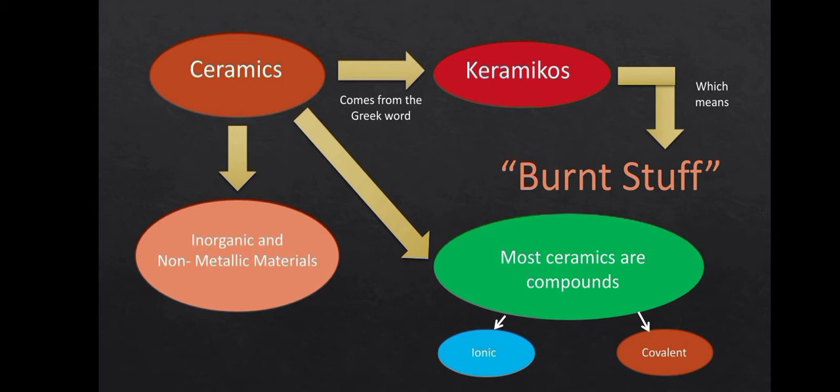Ceramics. The tradition of creating ceramics is something that started thousands of years ago with the invention of pottery, glass, and brick, and it's something which is continued today. New ceramic materials are being created in order to meet new challenges.

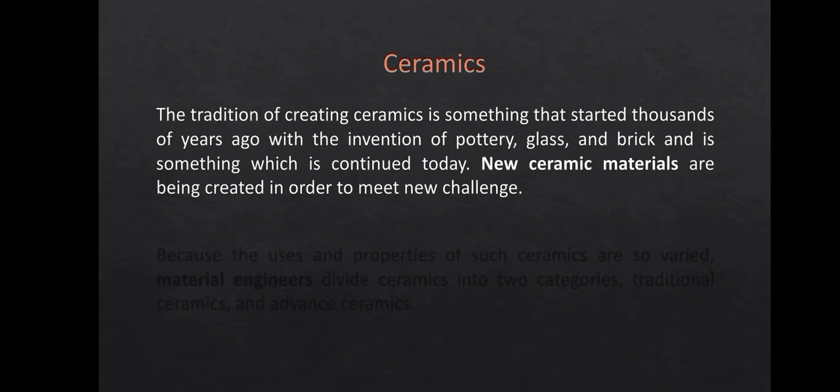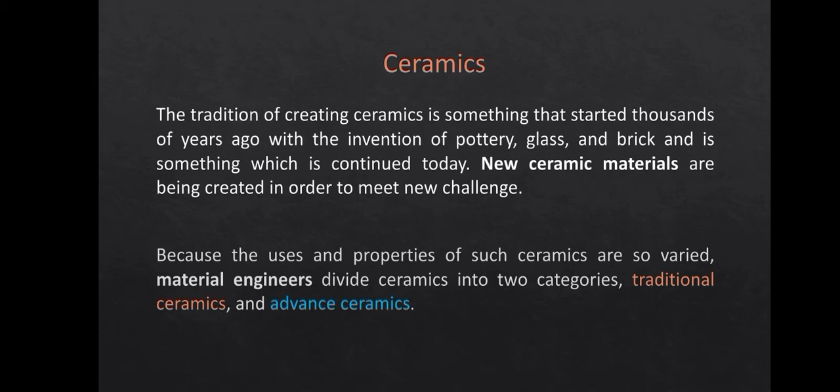As mentioned previously, the properties of ceramics vary depending on design and application. However, many ceramics are known to have the following properties. Una, they are hard. Yung mga ceramics ay hindi madaling magbago yung size and shape. Kalawa, they are brittle, meaning they have a low resistance to impact.

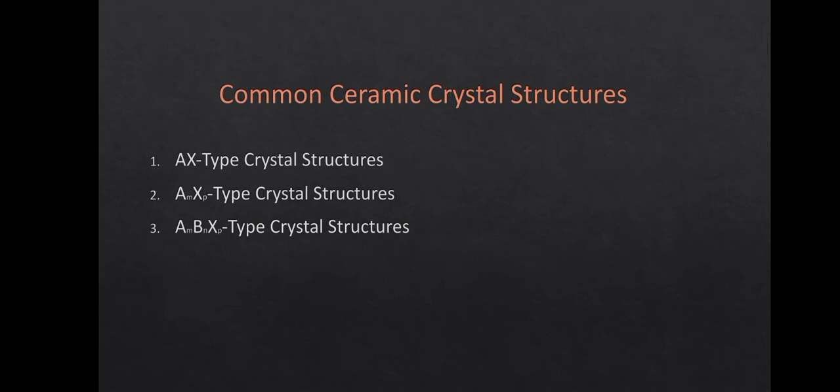Common ceramic crystal structures. So, una, AX type crystal structures. Kalawa, AmXp type crystal structures. At ikatlo, AmBnXp type crystal structures. So, sa AX type crystal structure ng ceramic, yung number of cations ay equal doon sa number ng anions. So, yung A, tumutukoy siya sa cation, habang yung X naman ay tumutukoy sa anion. So, ilan sa mga halimbawa ng AX crystal structure ay ang rock salt structure, cesium chloride structure, at zinc blende structure.

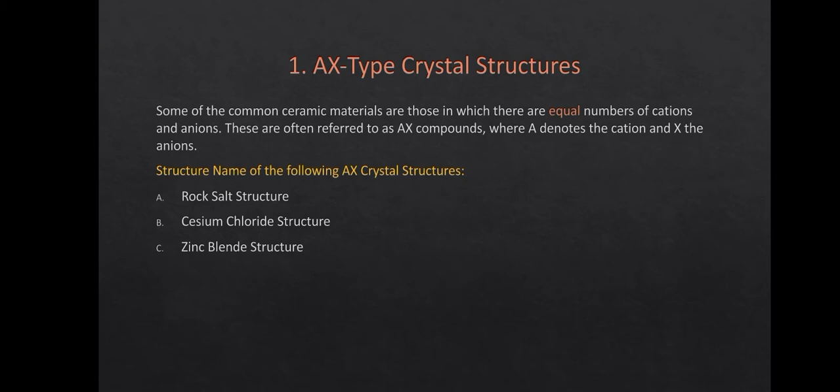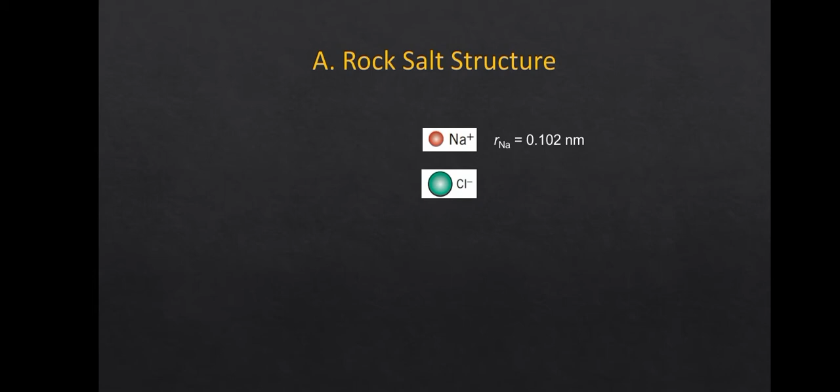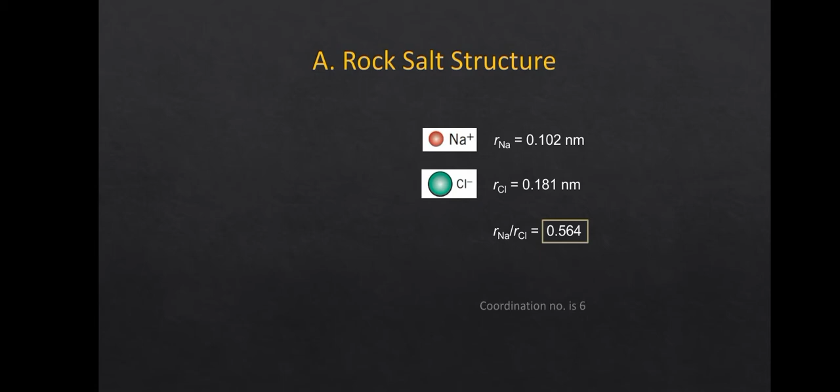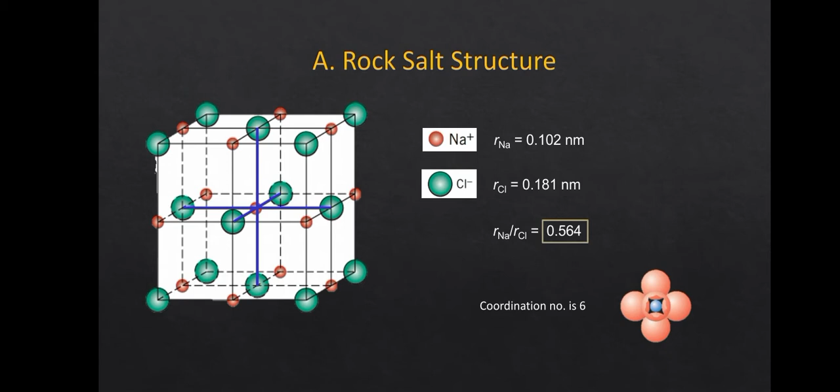So, yung rock salt structure ay binubuo ng sodium at chlorine. So, kung mapapansin nyo, equal yung number ng cations doon sa number ng anion. So, yung radii ng sodium ay equal to 0.102 nanometer, habang yung radii naman ng chlorine ay equal to 0.181 nanometer. So, yung ratio nila ay equal to 0.564. Then, yung coordination number nila is 6. Kaya, yung coordination geometry nila ay octahedral. So, ayan yung itsura ng rock salt structure. Yung rock salt structure ay maliit na bahagi lang ng rock salt.

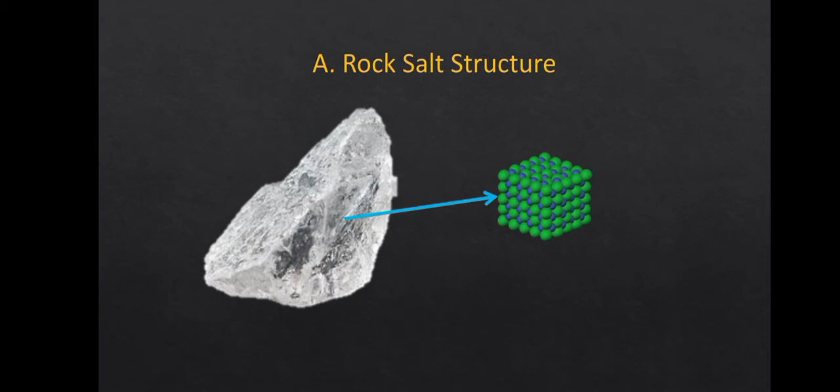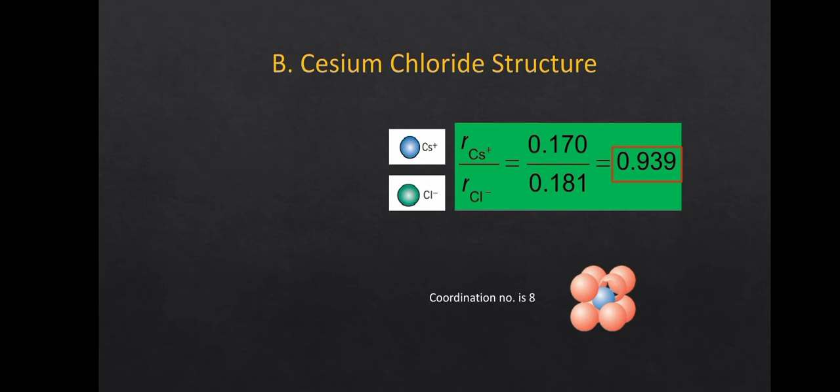Next, cesium chloride structure. So, meron tayo ditong cesium at chlorine. So, yung ratio nila ay equal to 0.939. Kaya, yung coordination number nila is 8. At yung coordination geometry nila ay cubic. So, ayan yung itsura ng cesium chloride structure. Next. So, yung cesium chloride structure ay maliit na bahagi lang ng cesium chloride.

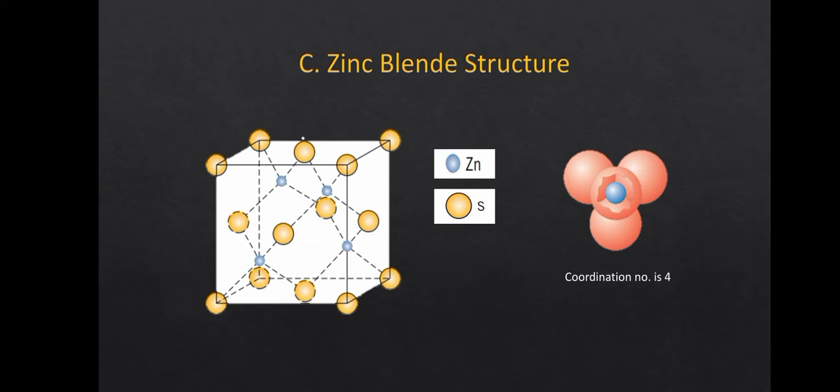Ayan. So, zinc blende structure. Yung zinc blende structure ay binubuo ng zinc at sulfur. Yung coordination number nila is 4. Kaya, yung coordination geometry nila ay tetrahedral. So, ayan yung itsura ng zinc blende structure. Yung zinc blende structure ay maliit na bahagi lang ng zinc blende. Next,

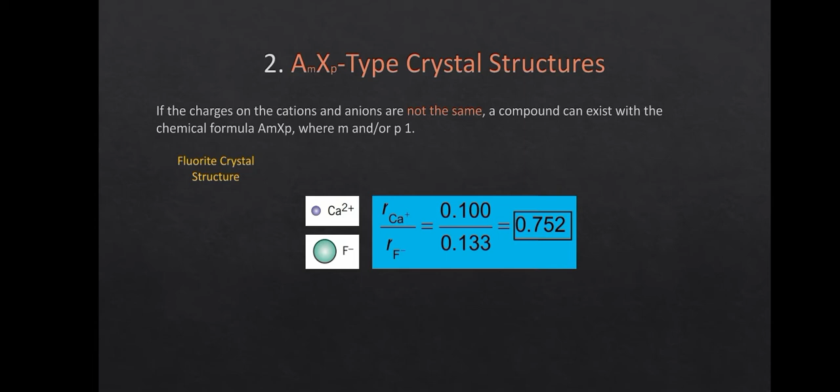AmXp type crystal structure. So, dito naman, hindi na equal yung number ng cations dun sa number ng anions. So, example nito yung calcium at fluorine. Yung calcium, meron siyang dalawang positive charge, habang yung fluorine naman meron siyang isang negative charge. Yung ratio nila ay equal to 0.752. Kaya yung coordination number nila is 8. At yung coordination geometry nila ay cubic. So, ito yung itsura ng fluorite crystal structure kapag pinagsama yung calcium at fluorine.

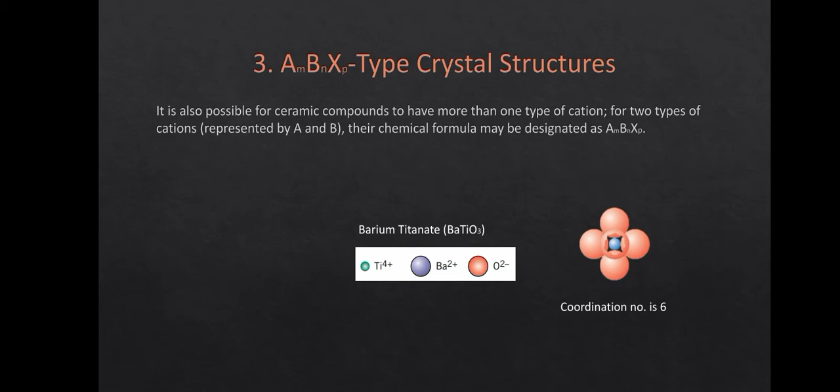Next, so dito na tayo sa last. AmBnXp type crystal structures ng ceramic. So, dito meron tayong dalawang magkaibang element na may positive charge, then meron tayong isang element na negative charge. So, isang example niyan, kapag pinagsama-sama yung tatlong yan, ay yung barium titanate. So, yung coordination number nila kapag pinagsama-sama mo sila is 6. At yung coordination geometry nila ay octahedral. So, ayan yung itsura ng structure nila. Tinatawag na perovskite crystal structure.

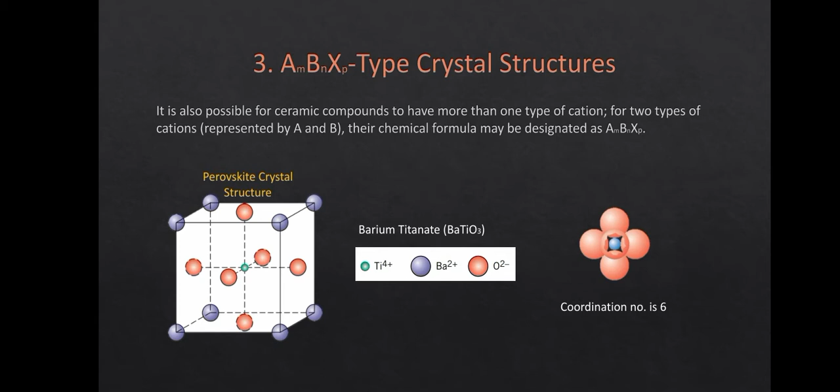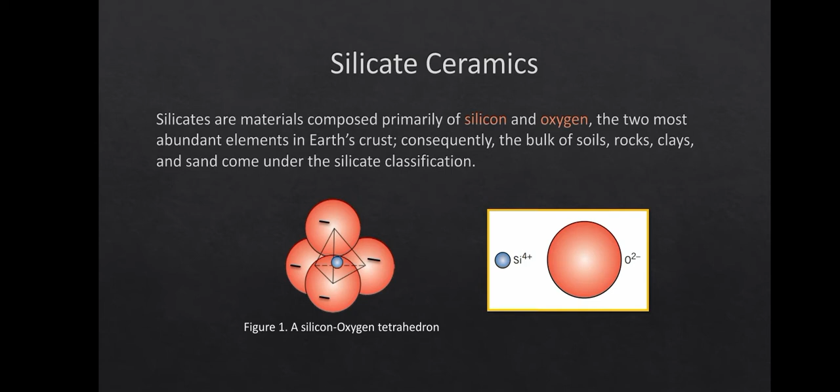Silicate ceramics. Silicates are materials composed primarily of silicon and oxygen, the two most abundant elements in Earth's crust. Ilan sa mga halimbawa ng silicates ay yung soils, rocks, clays, and sand. So, naturally occurs yan. Ibig sabihin gawa ng kalikasan. So, ito yung figure 1 na nagpapakita ng coordination geometry ng silicate. Silicate ceramics include the following. Una, the crystalline silica. Ikalawa, layered silicates. At ikatlo, yung non-crystalline silica glasses.

Crystalline silica structure. Chemically, the most simple silicate material is silicon dioxide or silica. It is a three-dimensional network that is generated when the corner oxygen atoms in each tetrahedron are shared by adjacent tetrahedra. Thus, the material is electrically neutral and all atoms have stable electronic structures. So, kung matatandaan nyo kanina, yung characteristics affecting the crystal structures. So, dito, kinakailangan electrically neutral and stable yung structure. Para maging stable siya, kailangan yung net charge niya ay equal to 0.

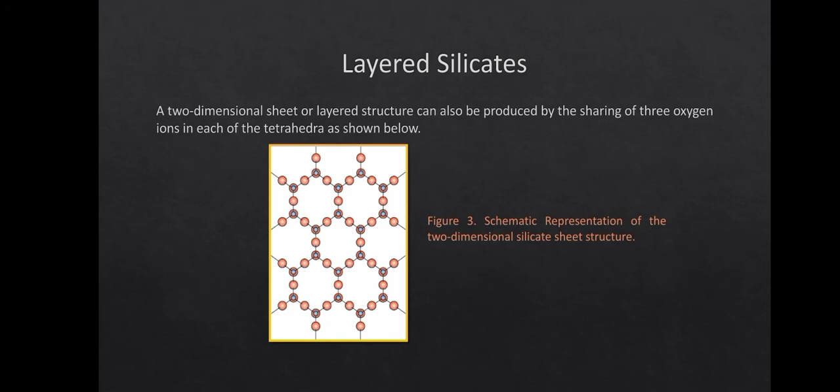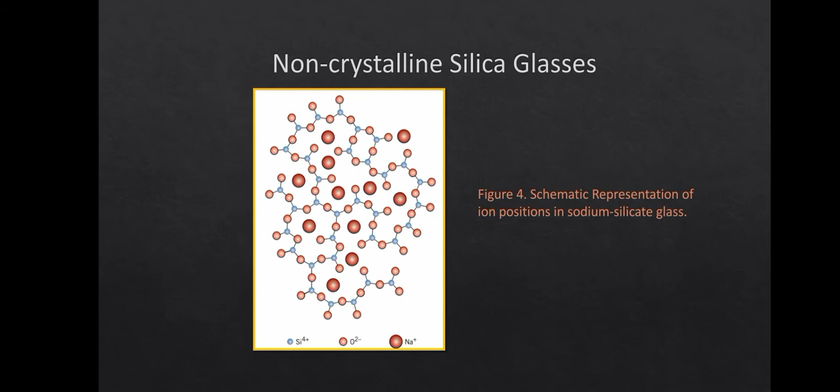Material of importance. Carbon. Carbon is the most important element to living things because it can form many different kinds of bonds and form essential compounds. Ayan. So, yung carbon, madali siyang i-combine sa iba't ibang elements. At yung compounds na nabubuo ay napakahalaga sa iba't ibang field sa industry.

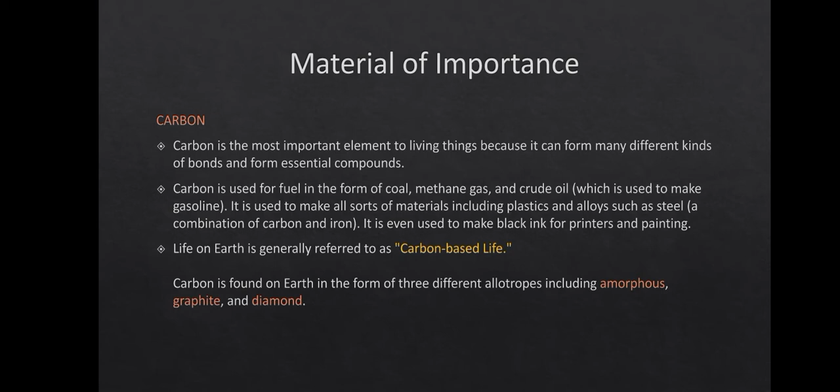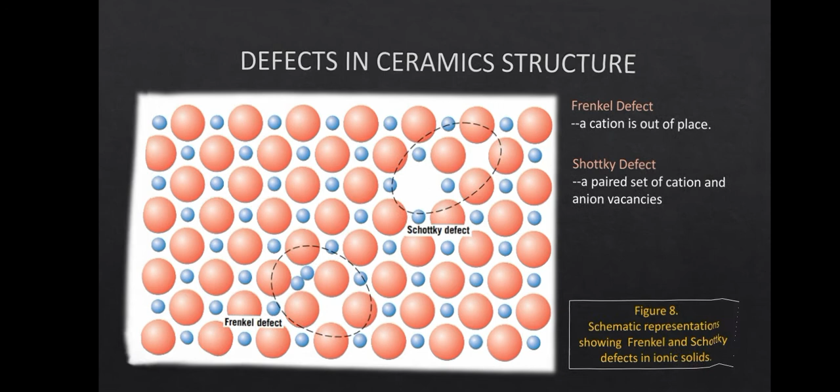Diffusion in ionic materials. Diffusion refers to movement or motion. An ionic compound is a chemical compound comprising ions held together by electrostatic force.

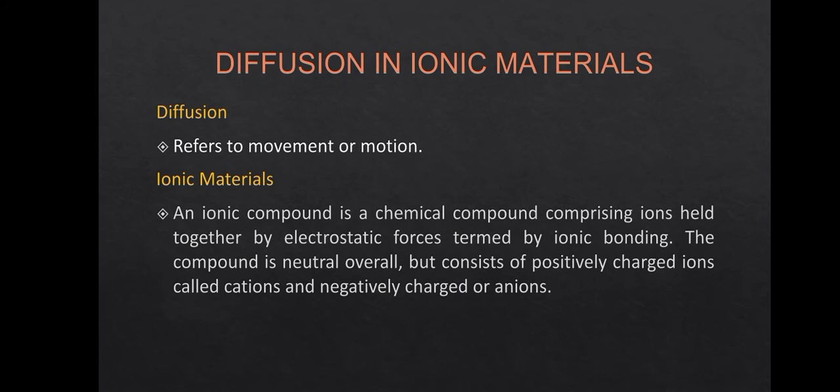Characteristics of ionic bonding: ionic compounds are usually hard, rigid, and brittle. This is the result of being held in specific positions.

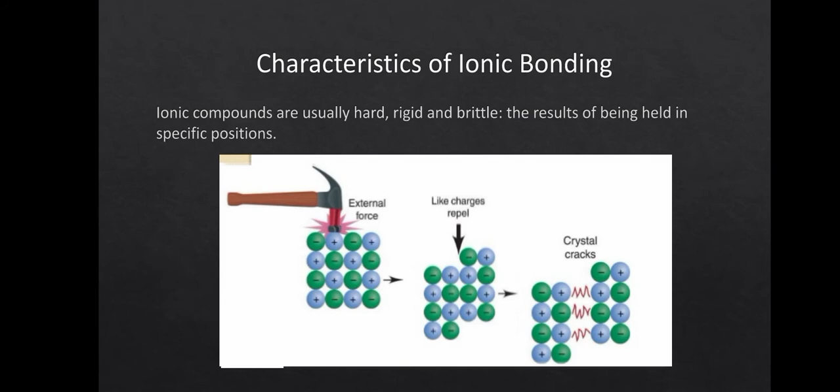Diffusion in ionic materials. Diffusion in these materials usually occurs by a vacancy mechanism in order to maintain charge neutrality in ionic material.

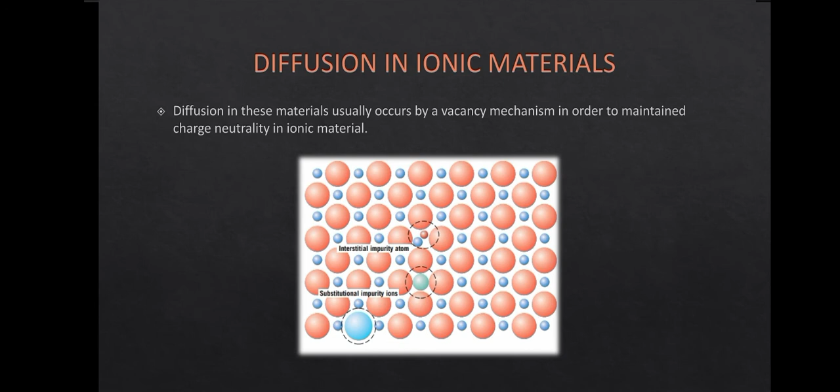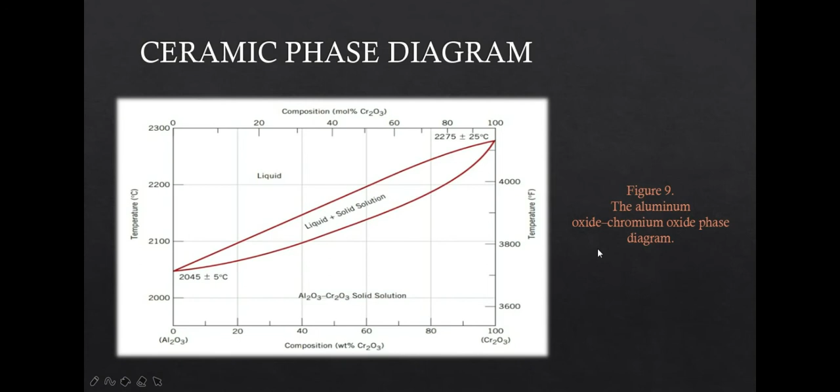Next diagram is the aluminum oxide, chromium oxide diagram. On the right side is the temperature in Fahrenheit, and on the left side is the temperature in Celsius.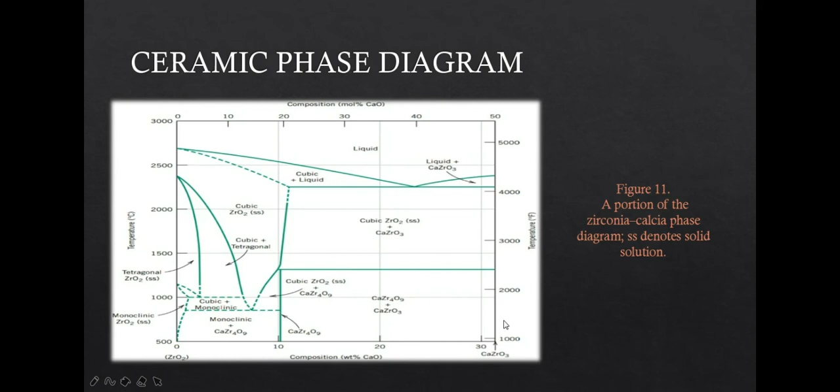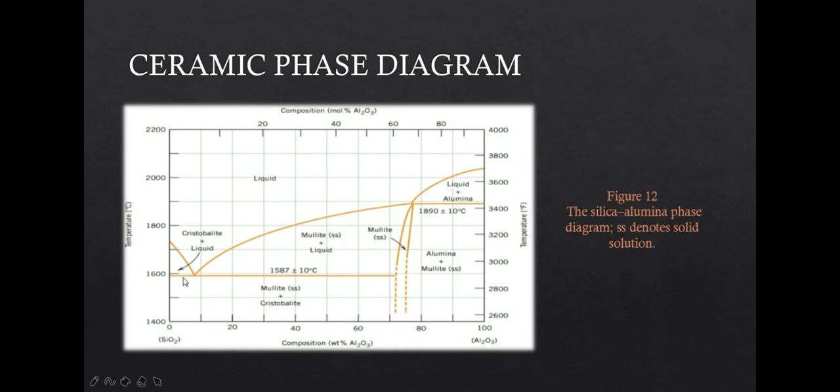Also, a single eutectic exists at 1587 degrees Celsius, and has a 7.7% weight of aluminum oxide. Ito yung 7.7 weight of aluminum oxide. Ito yung isang eutectic na nag-exist dito sa diagram na to.

Mechanical properties. Between 3,000 and 4,000 years ago, metals came into widespread use because of their toughness that is derived from their ductility. For most of that history, ceramic materials were somewhat limited in applicability because of their brittle nature.

Bago ang panahon ng tanso, ang mga kagamitan ng tao at imbakan nila ay karaniwang gawa sa bato. Between 3,000 and 4,000 years ago, ang paggamit ng metal ay laganap dahil sa matigas at matibay ito. Most of that history, the use of ceramic materials is somewhat limited because of its brittleness. Bagaman maraming bagong pinaghalo at iba pang multi-phase na ceramics na binuo at mas may pakinabang, yung mga brittle pa rin ang ginagamit sa kasalukuyan.

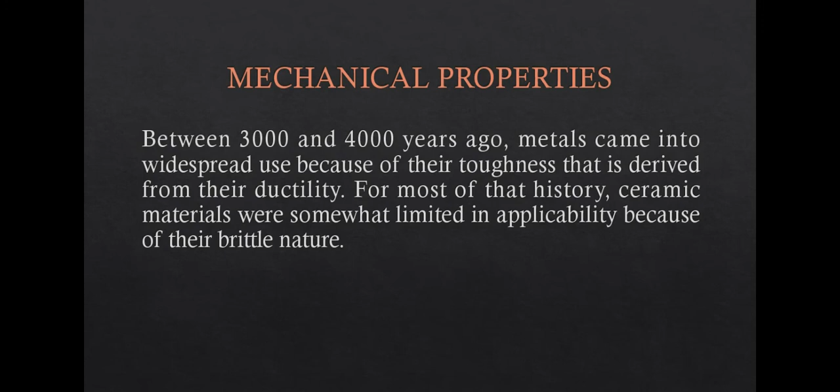The brittle fracture process consists of the formation and propagation of cracks through the cross-section of material in a direction perpendicular to the applied load. Crack growth in crystalline ceramics may be either transgranular, through the grains, or intergranular, along grain boundaries. For transgranular fracture, cracks propagate along specific crystallographic or cleavage planes of high atomic density.

Ang intergranular fracture ay nangyayari kapag ang crack ay kumalat hanggang sa dulo o hangganan ng isang material, lalo na kapag ang hangganan ng material na ito ay humina na. Ang transgranular fracture naman ay nangyayari kapag lumalaki ang lamat sa bawat piraso ng material.

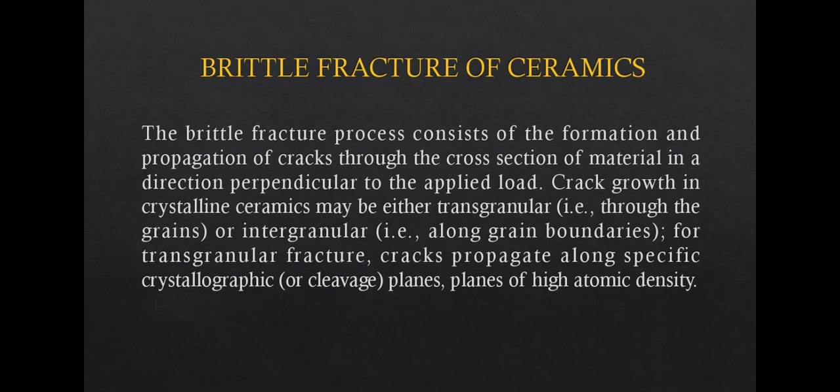The measured fracture strengths of most ceramic materials are substantially lower than predicted by theory from interatomic bonding forces. This may be explained by very small and omnipresent flaws in the material that serve as stress raisers, points at which the magnitude of an applied tensile stress is amplified, and no mechanism such as plastic deformation exists to slow down or divert such cracks.

Ang mga stress raisers na ito ay tinatawag na interior cracks or micro cracks, internal pores, inclusions, and grain corners na imposible nang matanggal at hindi na makontrol. For example, even moisture and contaminants in the atmosphere can introduce surface cracks in freshly drawn glass fiber that can affect its strength. Ang stress concentration sa dulo ng isang material ay pwedeng magdulot ng crack at lumala pa at masira na ng tuluyan ang isang material.

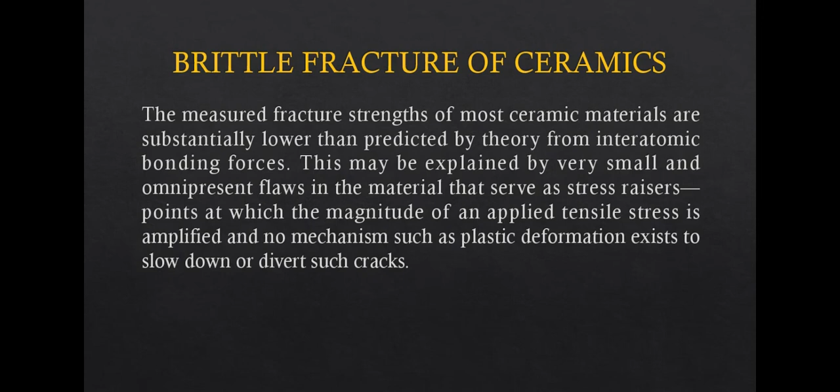The measure of a ceramic material's ability to resist fracture when a crack is present is specified in terms of fracture toughness. The plane strain fracture toughness is defined according to this expression, where Y is a dimensionless parameter or function that depends on both specimen and crack geometries. Stress is the applied stress, and A is the length of a surface crack or half of the length of an internal crack.

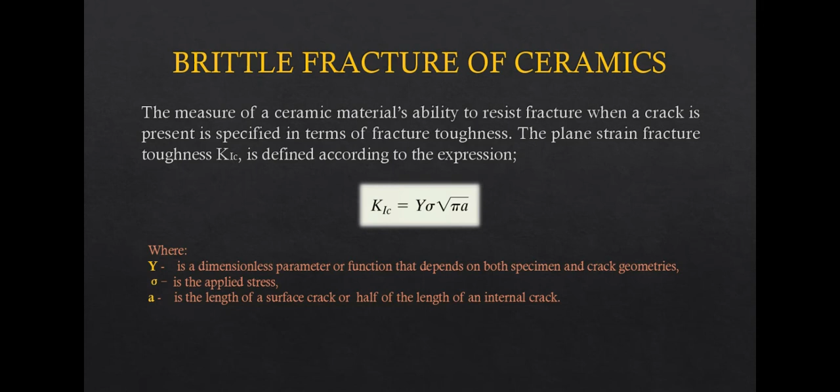Fractography of ceramics. It is sometimes necessary to acquire information regarding the cause of a ceramic fracture so that measures may be taken to reduce the likelihood of future incidents, as failure analysis normally focuses on determination of the location, type, and source of the crack-initiating flaw. A fractographic study is normally part of such an analysis, which involves examining the path of crack propagation as well as microscopic features of the fracture surface.

Ang fractography ay isang teknik na ginagamit at ginagawa upang maintindihan kung ano ba ang mga causes ng failures o dahilan ng pagkasira ng isang bagay o material. Also, to verify din ang mga theoretical failure predictions sa totoong buhay.

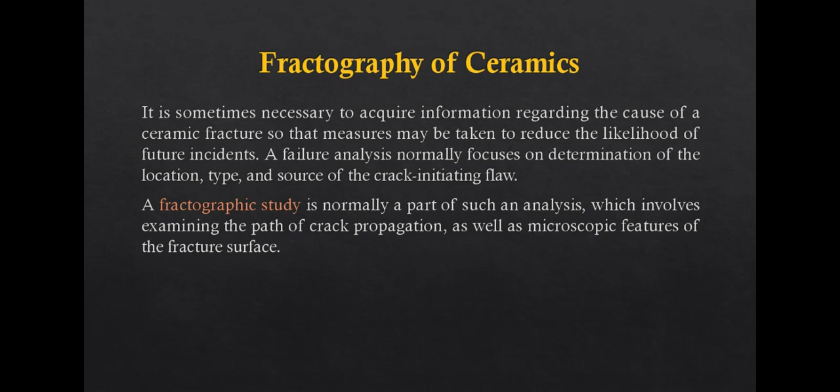For brittle ceramic materials, schematic representations of crack origins and configuration that result from: impact or point loading, bending, torsion, and internal pressure.

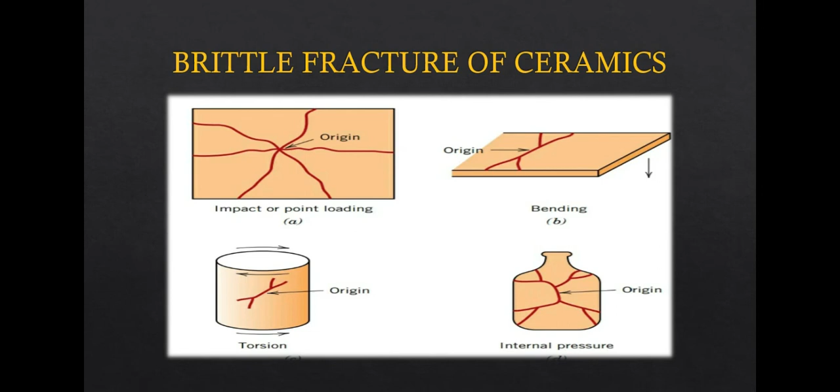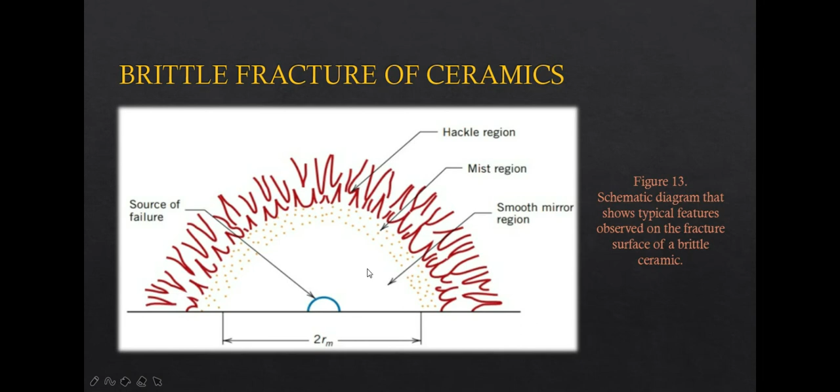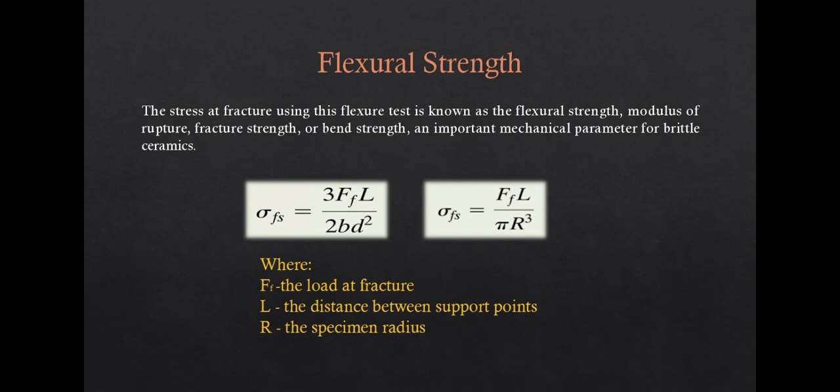The slope in the elastic region is the modulus of elasticity. The range of this modulus of elasticity for ceramic materials is between 70 and 500 gigapascals, being slightly higher than for metals.

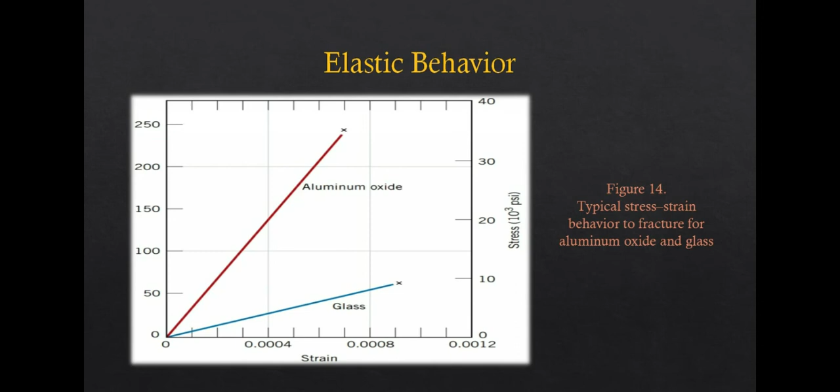Also note that the material will not experience plastic deformation before fracture. Mechanisms of plastic deformation. Under mechanism of plastic deformation is crystalline ceramics.

For crystalline ceramics, plastic deformation occurs as with metals by the motion of dislocations. One reason for the hardness and brittleness of these materials is the difficulty of slip or dislocation motion.

For crystalline ceramic materials for which the bonding is predominantly ionic, there are very few slip systems, crystallographic planes, and directions within those planes along which dislocations may move. This is a consequence of the electrically charged nature of the ions.

For slip in some directions, ions of like charge are brought into close proximity to one another. Because of electrostatic repulsion, this mode of slip is very restricted, to the extent that plastic deformation in ceramics is rarely measurable at room temperature.

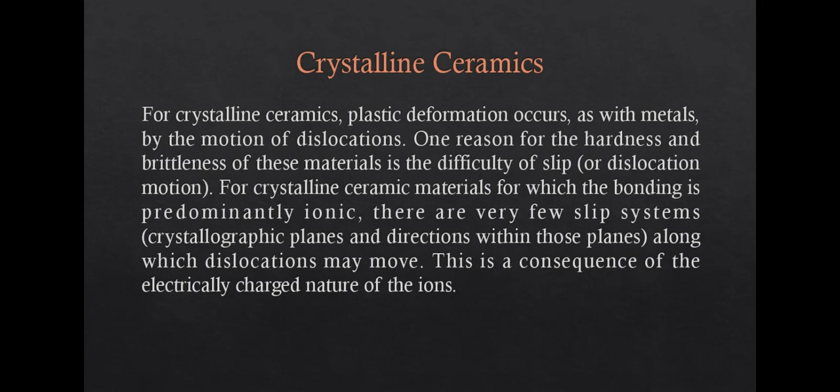However, for ceramics in which the bonding is highly covalent, slip is also difficult, and they are brittle for the following reasons: first, the covalent bonds are relatively strong. There are also limited numbers of slip systems, and dislocation structures are complex.

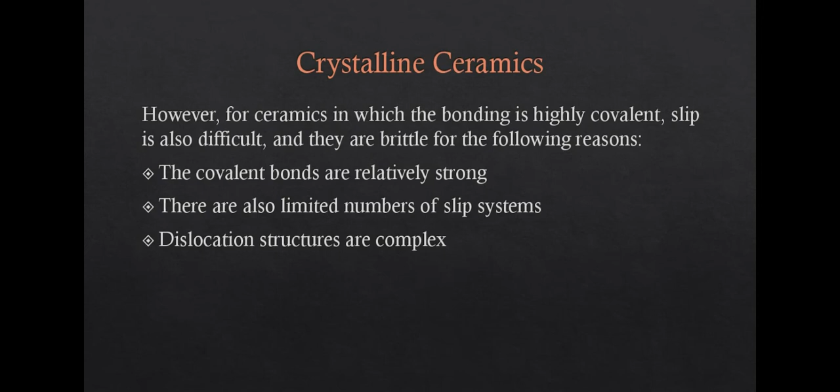Next, non-crystalline ceramics. Plastic deformation does not occur by dislocation motion for non-crystalline ceramics because there is no regular atomic structure. Rather, these materials deform by viscous flow, the same manner in which liquids deform.

The rate of their deformation is proportional to the applied stress. In response to an applied shear stress, atoms or ions slide past one another by the breaking and reforming of interatomic bonds. However, there is no prescribed manner or direction in which this occurs, as with dislocations.

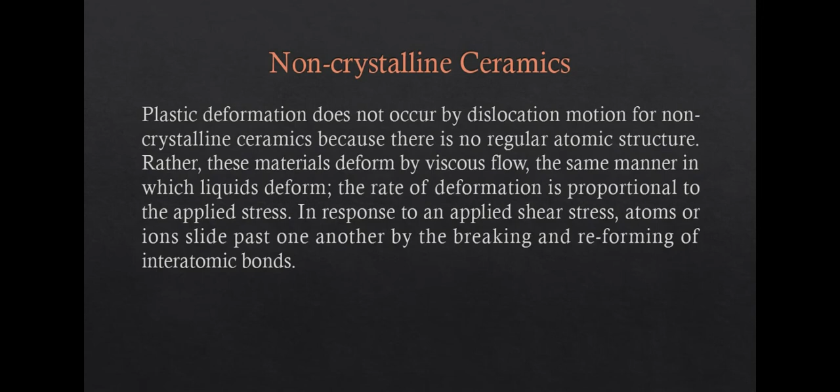The characteristic property for viscous flow, viscosity, is a measure of a non-crystalline material's resistance to deformation. For viscous flow in a liquid that originates from shear stresses imposed by two flat and parallel plates.

The viscosity is the ratio of the applied shear stress and the change in velocity with distance in a direction perpendicular to and away from the plates, expressed as viscosity equals shear stress over dv over dy, or F over A divided by dv over dy.

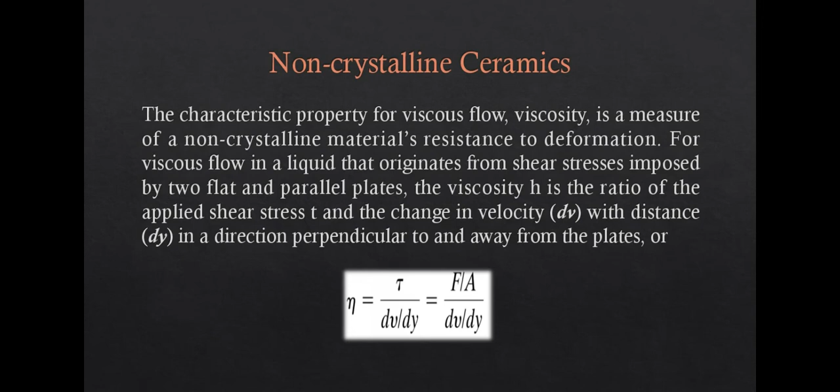The units for viscosity are poise and Pascal seconds. 1 poise is equal to 1 dyne second per centimeter squared, and 1 Pascal second is equal to 1 Newton second per square meter. Conversion from one system of units to the other is according to 10 poise equals 1 Pascal second.

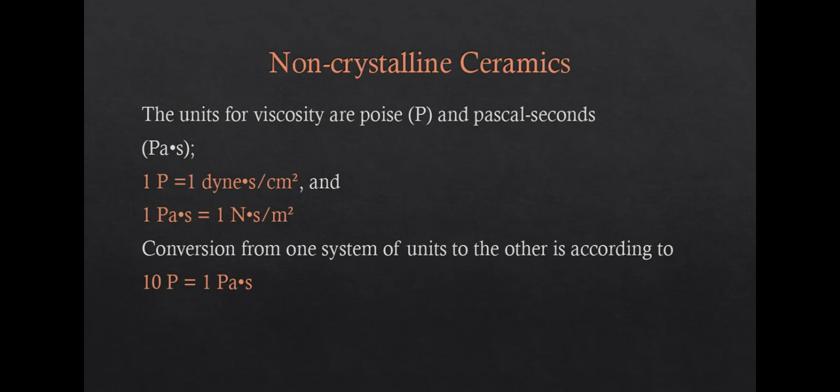Then V and Y are the velocity and distance in a direction.